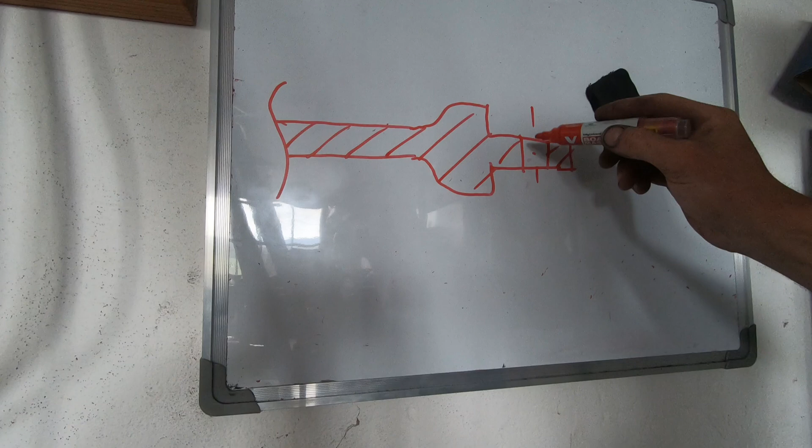Unfortunately I don't have any pictures of how that control arm looked before, but I can sketch it for you. It was made in such a way that in the front there was a very sharp corner, and there it was evident that the control arm was actually broken, the crack started before. So I was very lucky that rod didn't break while driving. It actually broke while I was practically standing still.

We went to the pits and the kind people of Ogulin pointed us to a local craftsman, a welder. We went to his shop and just welded the thing back together. This is how that looked.

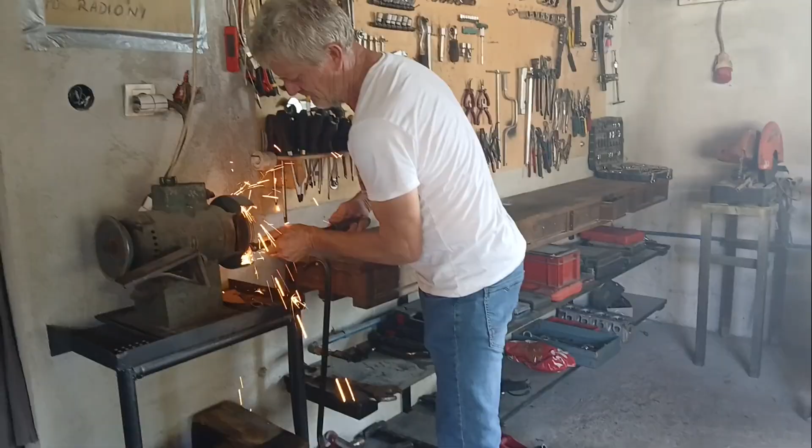Then we ground that rod down so it didn't have any sharp corners again, and mounted it all back together so I could make it to the other two races we had that day. Of course, I also disassembled the other side and ground off that sharp edge that was there.

So now, without further ado, let's lift the car up and take a closer look at the underside, the suspension, and just how we could make this better to prevent the cracking of the connecting rods in the future.

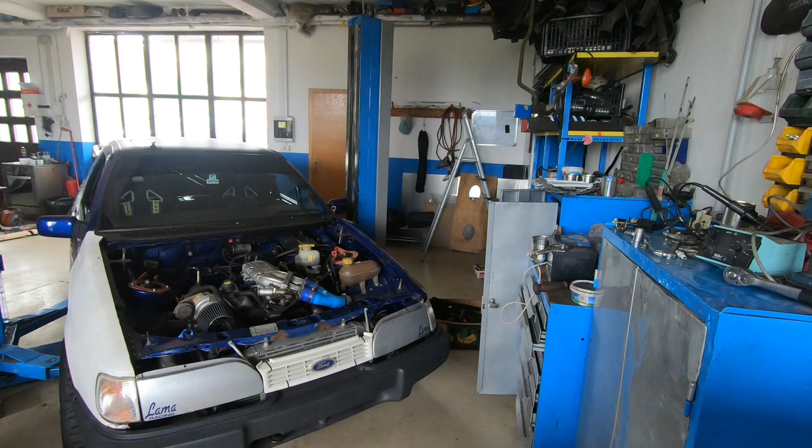So here you can see this rod. We got a uniball here in the back, and here in the front is where it broke. As you can see, this is all welded together now, and there are no really sharp corners.

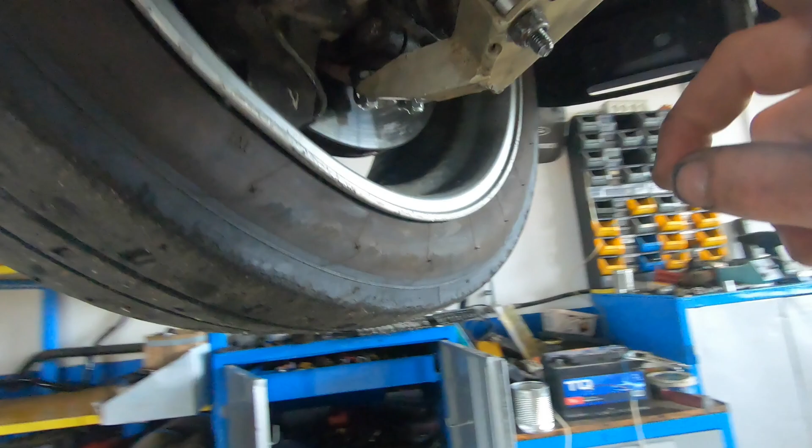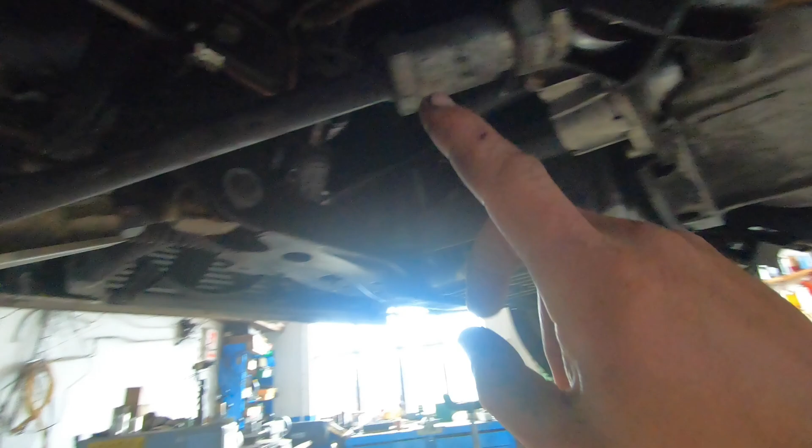But I'm thinking I should put this sort of uniball also here in the front. Evidently, because this was bent a little, this surely moves, so it is actually deforming this rod. And if we would install this kind of uniball in the front as well, this tension wouldn't be present at all. And that's what we're shooting for.

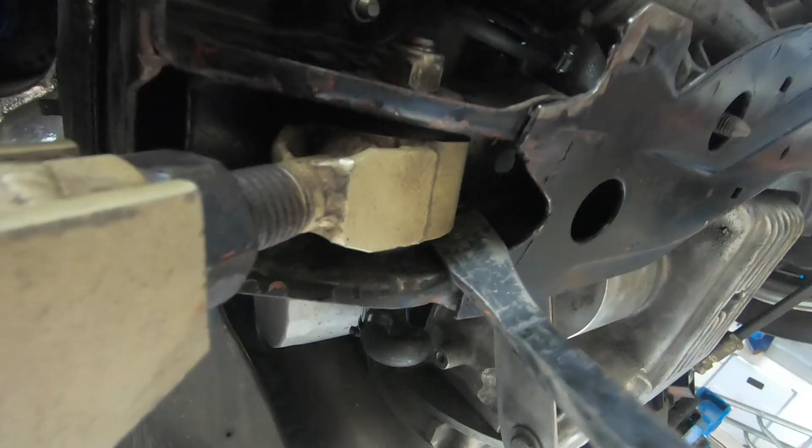Besides that, I've also noticed we got a little bit of play here. Just a little bit - this is totally acceptable by my standards. But this one, look at this, this is too much play for sure.

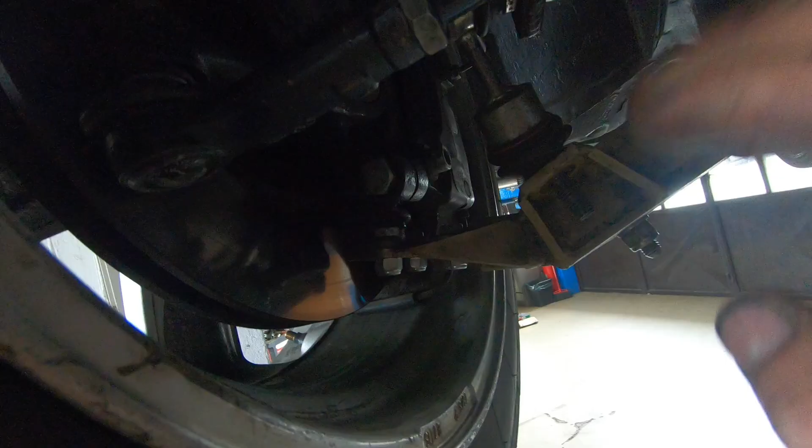So what I'm gonna do now is just take all of this apart and really examine everything, also these joints here - practically the whole front end. Let's do that.

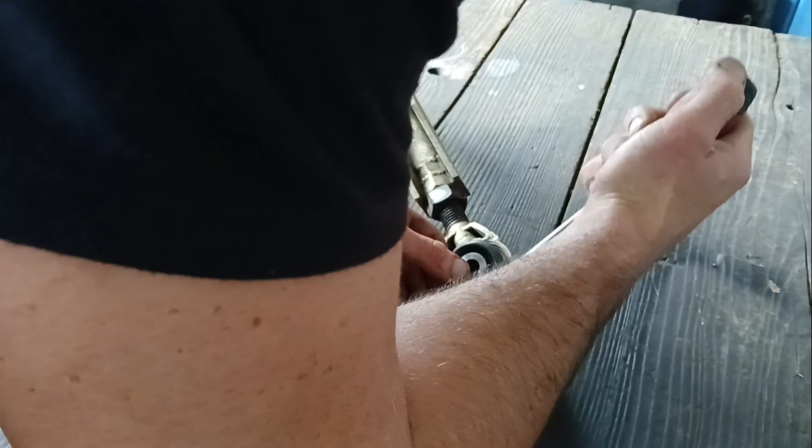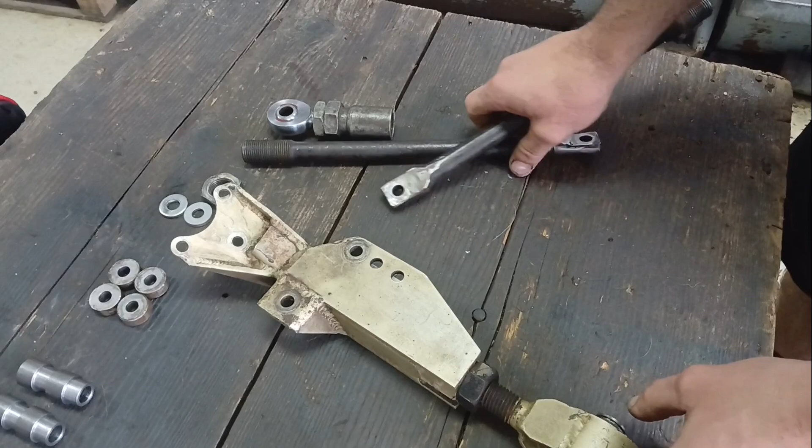Alright, scratch that. If we were to put this kind of uniball on this side also, the swing arm wouldn't be supported in this direction and it would move front and back, while this kind of solid end keeps it always straight, and the swing arm just travels in this fashion here. So this is the correct way.

What we're gonna do here is make this kind of rod again, but much stronger, out of some high-grade steel, and also without any sharp edges, just a smooth transition. And also we'll make this side a little thicker.

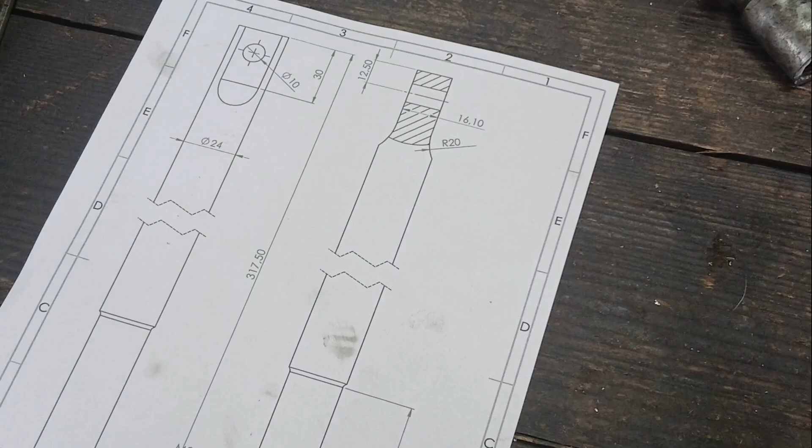Alright, something like that. This is a 1:1 ratio drawing, so as you can see here, this will be a bit thicker, and the main point is that this side will be thicker as well. See that? Instead of 9mm thickness here, we'll have 16mm, so that should be much stronger, and this simply won't break.

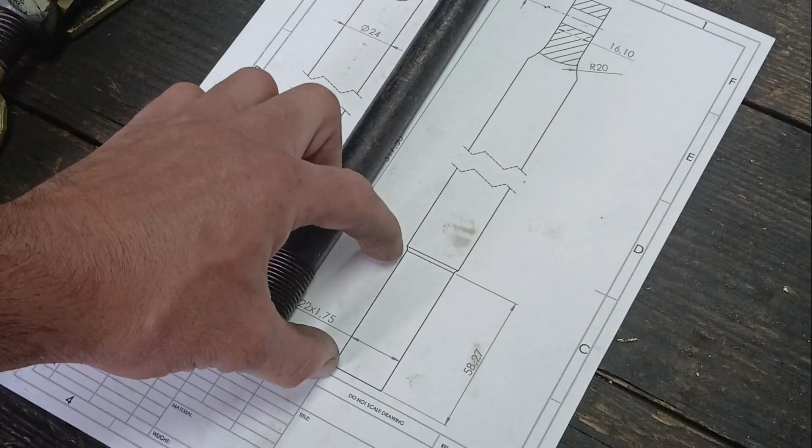On this side I will have the exact same thread made as here, just while we're at it, I'm gonna make it a little longer so we'll have that extra bit of adjustment. We will be able to lengthen this rod even further, if that will make sense at any point.

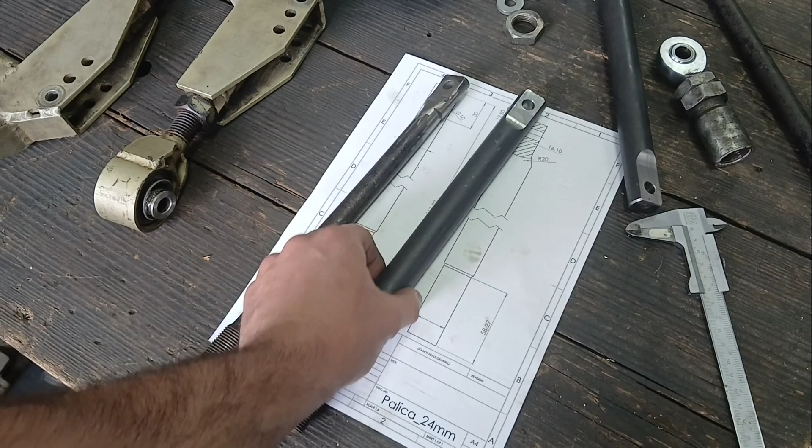This is some kind of heavy duty steel, so it really shouldn't bend at any load that we'll be seeing on this car. And yeah, just look at it in comparison - it is much thicker. This is 18mm in size, and this one is 24mm. This kind of thickness here in the middle really is overkill, but this came like this in bulk.

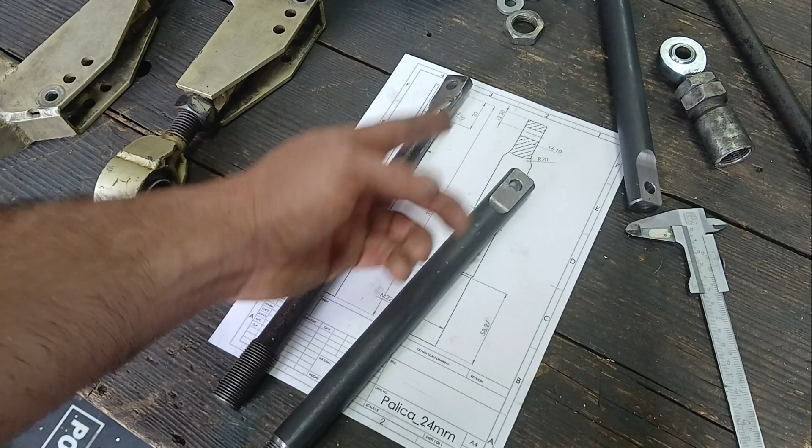And just to keep it simple, we've just made the thread here, and here it's just milled away, so we get two straight surfaces here, and also still keep it very thick, and most importantly without any sharp edges. This is really a smooth transition, and here is practically no way of breaking this.

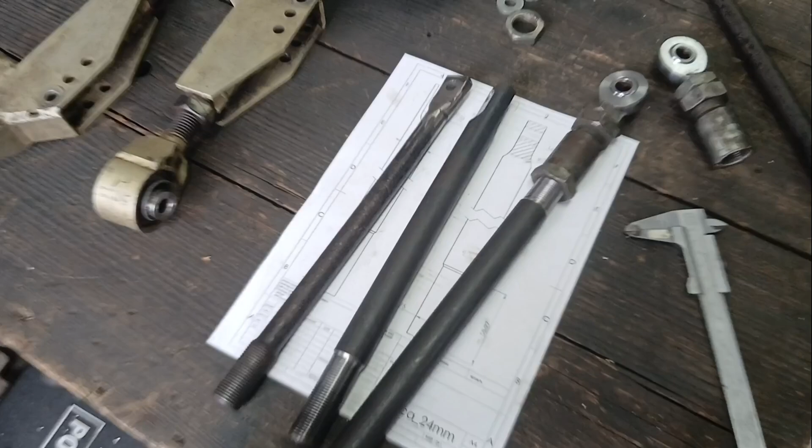So now I'm gonna go ahead and just put everything together. For a starting point, of course, I will just set it all up as it was, you know, the length, and just try mounting everything back together.

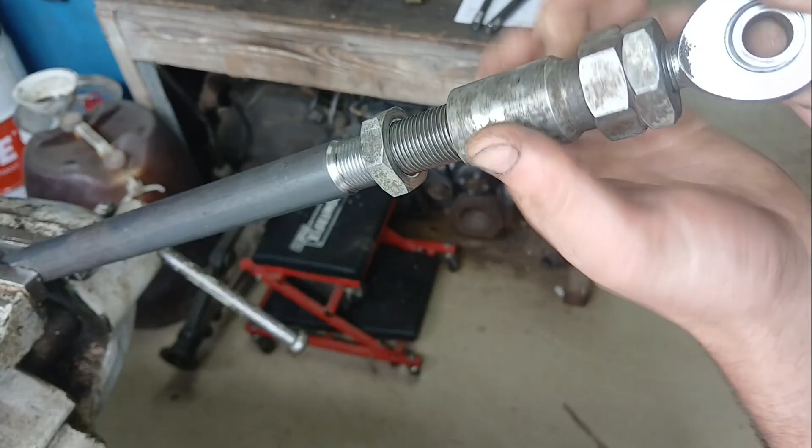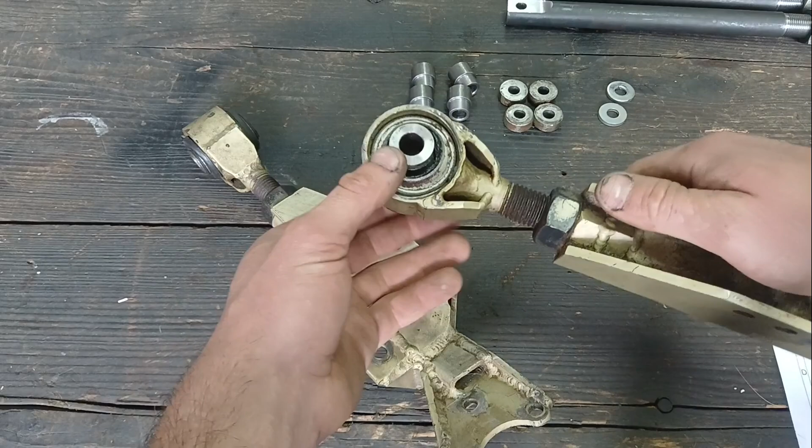Alright, so while we're at it, we're gonna of course also change these ball bearings as well, because those are quite worn. This play is very obvious.

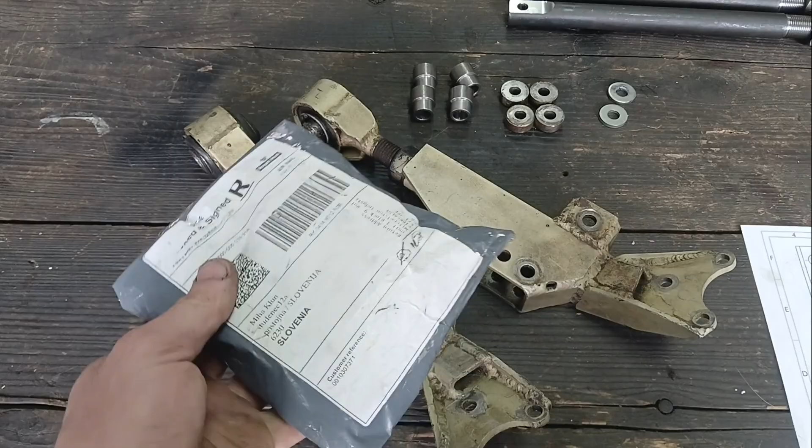So what I did is I actually ordered some new ball bearings along with the housings, because I couldn't find any of these dimensions here. I got the package right here. I haven't even opened it yet, but yeah, let's pop it open and see what we got. Okay, so that's it, I guess.

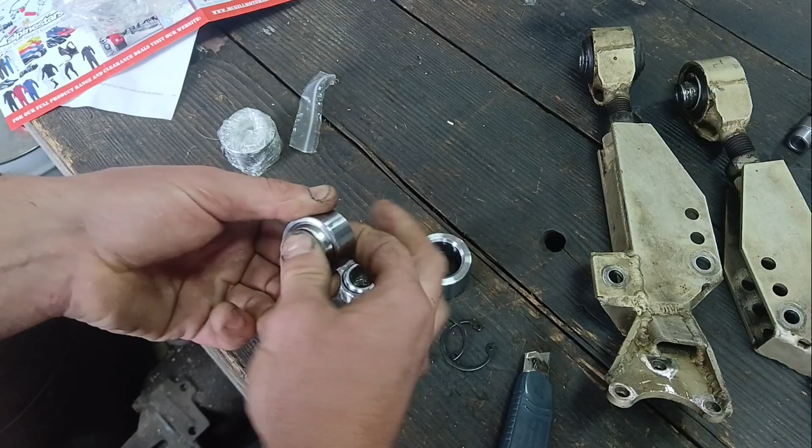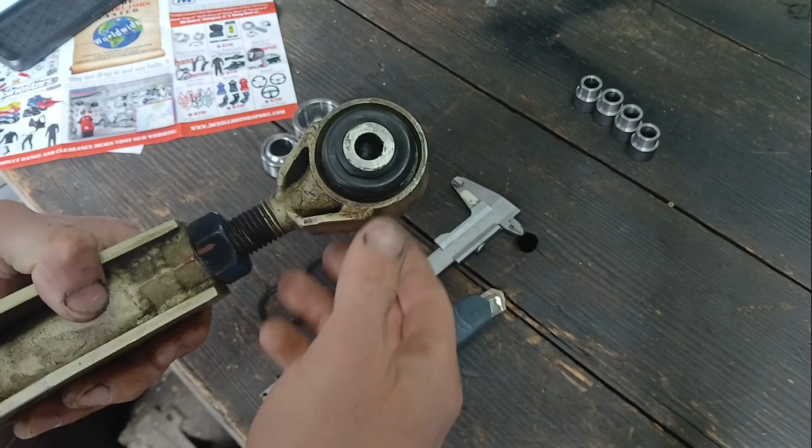Okay, let's see about the sizes here. This will actually try and fit inside the swing arm here. We will have to push these out on both arms, and then somehow fit these housings inside.

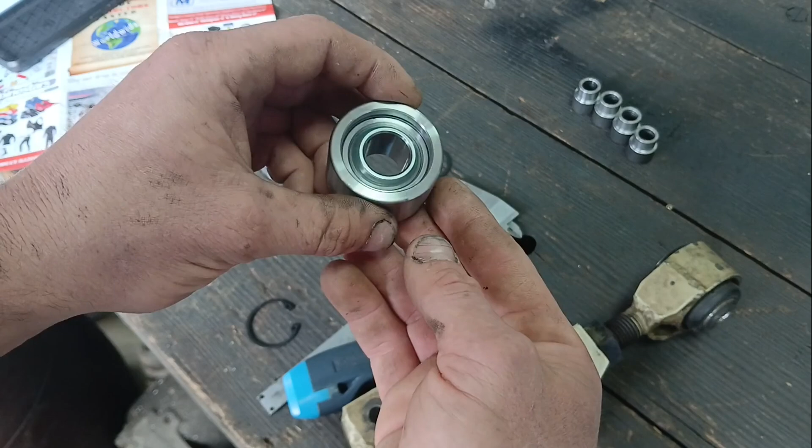Then these uniball bearings come inside here like so, and we simply secure them with these. We have a ridge machined here, and these come inside, and that's how they're secured. My main concern is that we have about a millimeter difference in this diameter compared to this one, but housings of this dimension were the closest I could find.

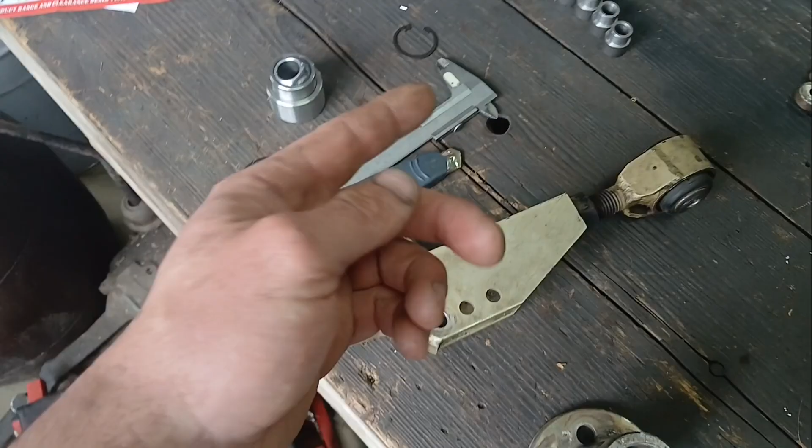So now we're gonna push these out and see how much slack we end up with. We might just weld in these housings, and then we'll be able to simply swap them for new ones once they wear out. So let's go now and press out these old bearings.

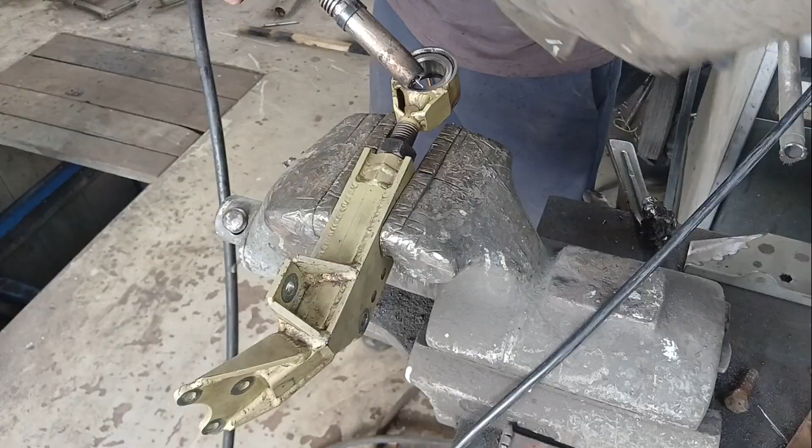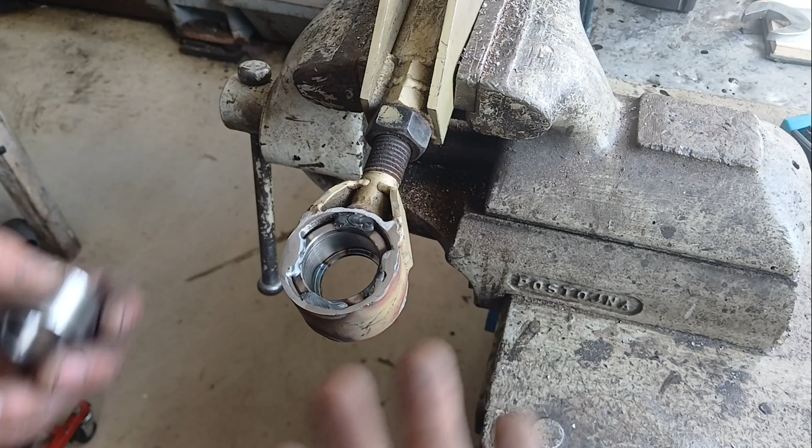So that's it. I put this uniball bearing housing inside there and put some welds on 4 spots. There isn't really a need to weld it all around, and also by doing that I might distort this, which would make it more difficult putting these in and out.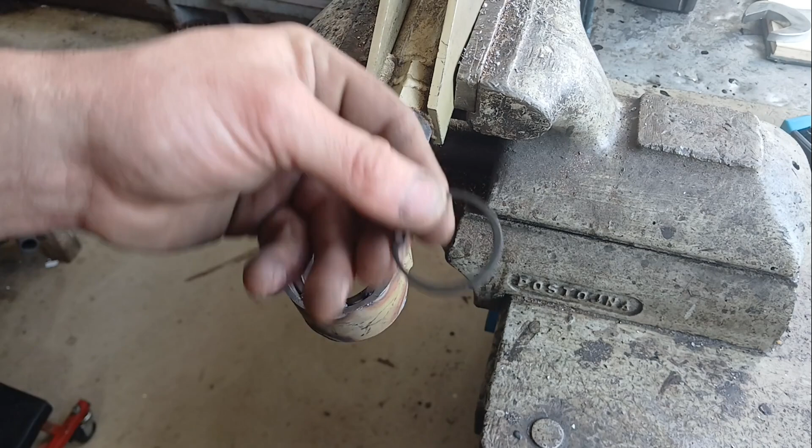Essentially this goes just in here like so, and then of course this retaining clip here. Now I'm gonna try to put everything together to see if I have distorted this maybe already, and then just give it a quick coat of paint, and then this thing will be ready for the assembly.

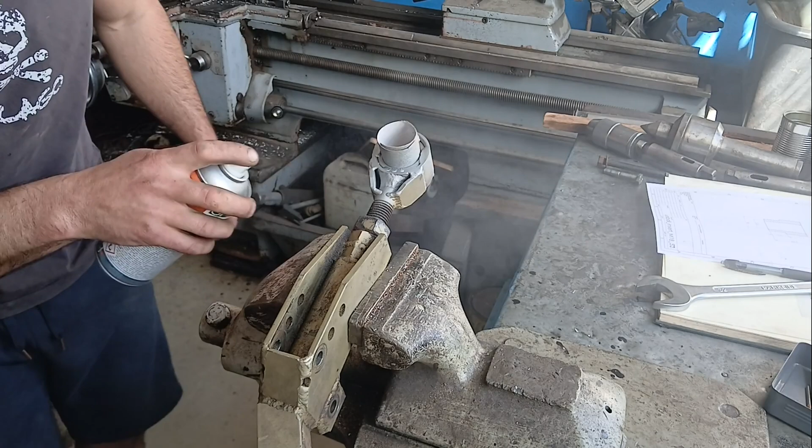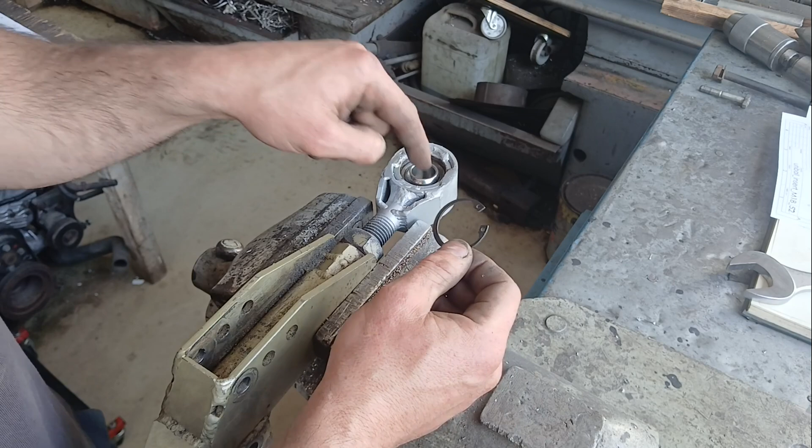I think once installed, these parts just slightly touch on the ball here, so I'm gonna grind off just a little bit of these edges. I guess this isn't really necessary, but better safe than sorry. Just like so.

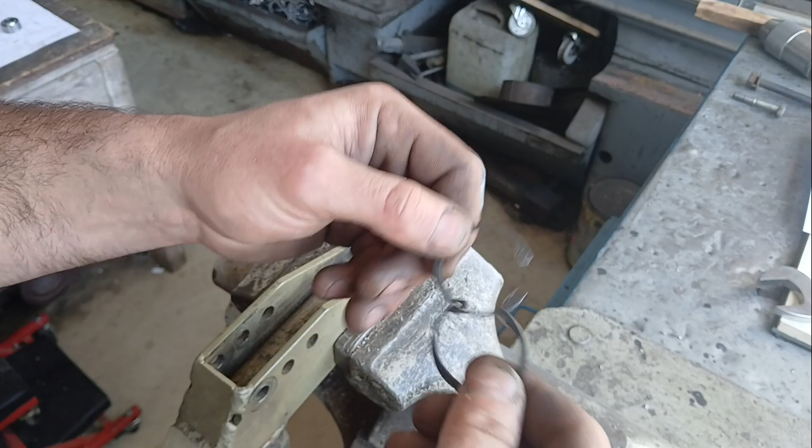As I said, this probably isn't necessary, but if it means prolonging the lifespan of these just a tiny bit, then it's worth it.

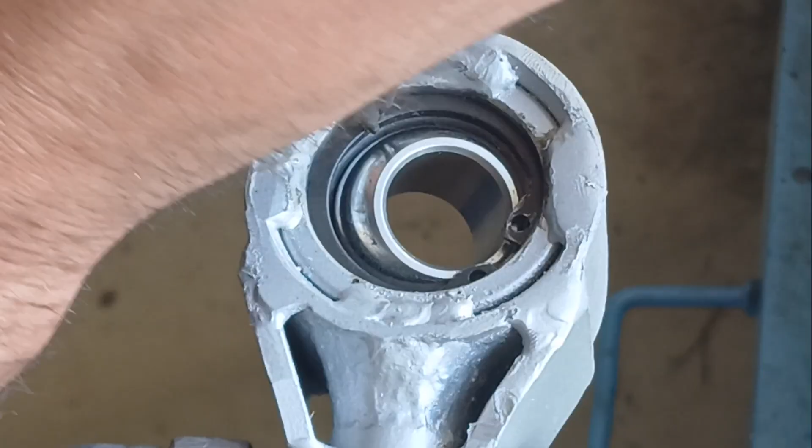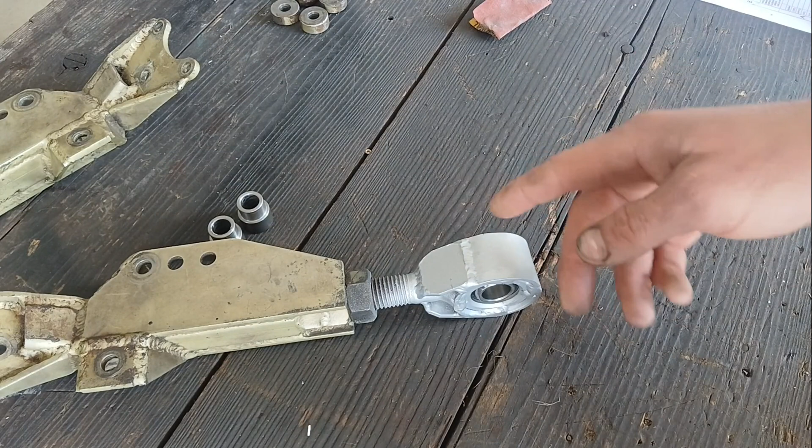Alright, so just like that, the ball bearing is installed. But we still haven't finished yet with this swing arm, because this of course won't fit the Sierra. We are still pretty far regarding the installation dimensions, right? We are missing some parts here. But here's where these come into play.

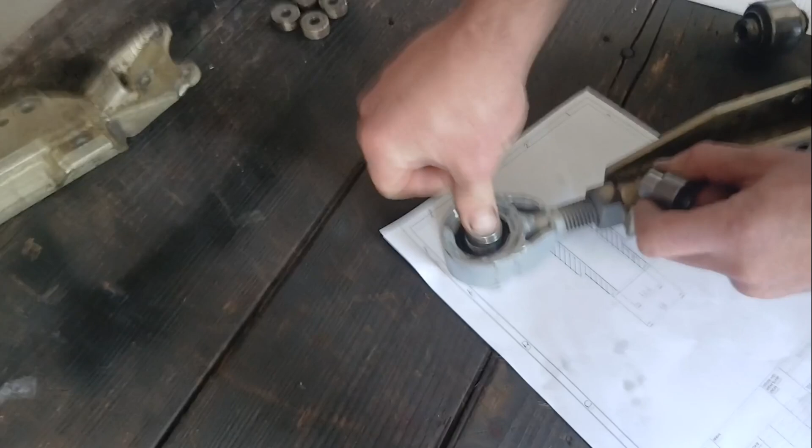So these just come fitted like so, and this is actually our finished result. This swing arm is now ready to be installed. Again, many thanks to our good sponsor, LBM Machining.

Now let's refurbish the left hand as well.

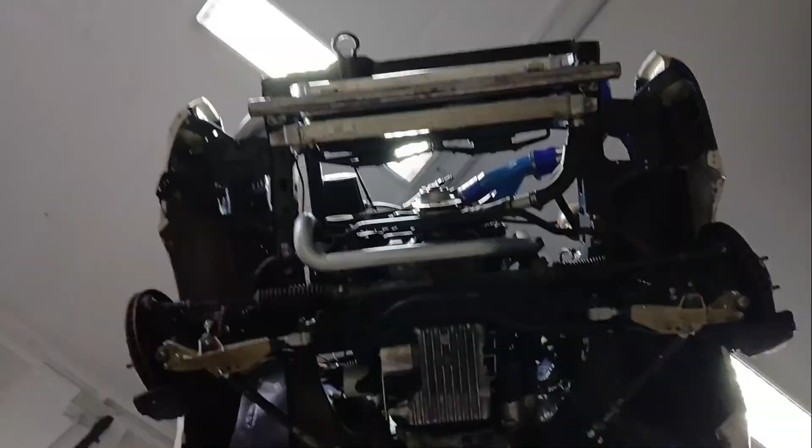Front suspension revision is done. Now this really wasn't a complete overhaul. We have yet to check the coilovers and everything, but we'll leave that for next time. As you've seen, this was actually a pretty straightforward job if you have the right parts.